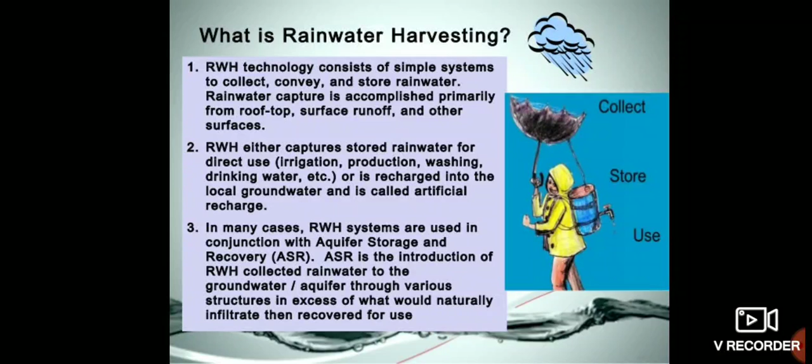So, the water conservation benefits of rainwater harvesting: the rainwater that falls on your roof and property is essentially free. All it takes is a method to harvest it into a tank for later use. Rainwater harvesting can be a great educational tool to get people to recognize their individual or household water uses.

For communities that rely on imported water to supply their needs, collecting rainwater that falls naturally in the community can reduce the need for imported water. Rainwater harvesting helps reduce peak demand during summer months, saving treated water for more important and appropriate water uses.

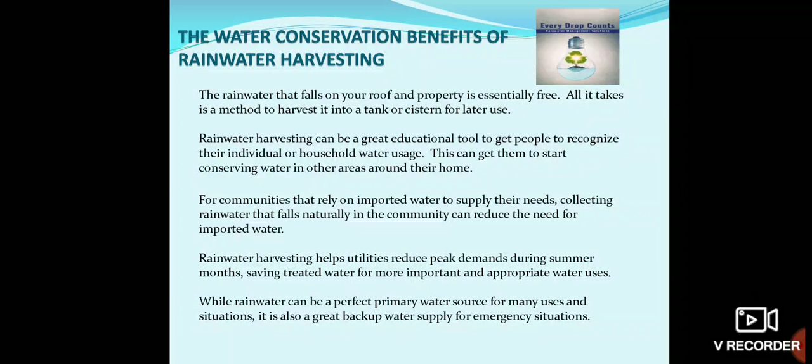While rainwater can be a perfect primary water source for many uses and situations, it is also a great backup water supply for emergency situations. So the environmental benefits of rainwater harvesting.

Rainwater harvesting can reduce stormwater runoff from property. The elimination of runoff can reduce contamination of surface water with pesticides, sediments, metals and fertilizers. By reducing stormwater runoff, rainwater harvesting can reduce the storm's peak flow volume and velocity in local creeks, streams and rivers, thereby reducing the potential for stream bank erosion.

Rainwater harvesting systems can be employed as a simple and effective method to meet a municipality's stormwater management program requirements for individual properties. It is an excellent source of water for plants and landscape irrigation since it has no chemicals such as fluorides or chloramines, that is chlorine.

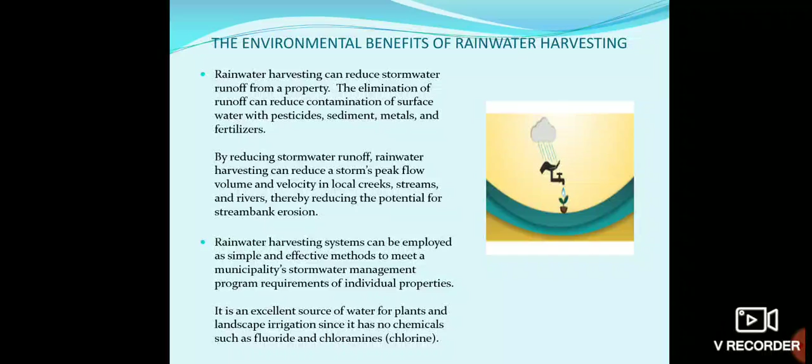So economic benefits of rainwater harvesting: collecting and using rainwater to replace municipal water use reduces your water bill. Reducing municipal water use for areas such as irrigation reduces the amount of water that the municipality has to treat and pump, thus in turn reducing the water service cost to the municipality.

The widespread implementation of rainwater harvesting within a municipality service area can reduce the long-term water development needs of the city, allowing the city to use their existing water infrastructure investment more efficiently.

The cost for a community to supply treated water is becoming more expensive every year. The cost of constructing dams, pipes and treatment plants, not to mention the cost of maintenance and infrastructure replacement, is huge. As water users, the ratepayers in the community ultimately will foot these rising bills.

Therefore, the practice of rainwater harvesting can reduce water demand and thus allow municipalities to provide potable water service at a lower cost. Designing and installing rainwater collection systems can provide sustainable jobs for the economy of the future. The rainwater harvesting industry can become a leading employer in the green infrastructure movement.

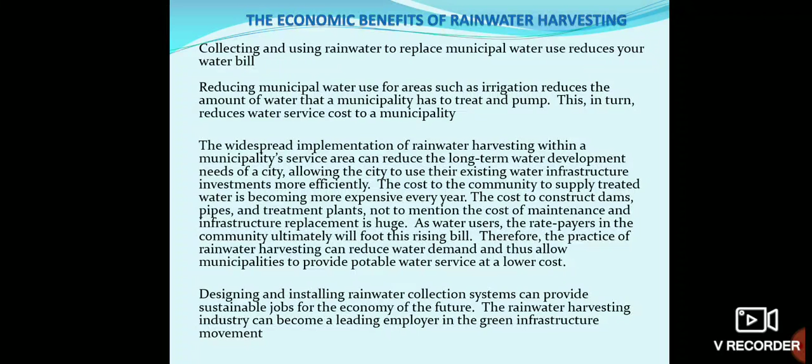Rainwater harvesting is vital for the future of sustainable water resources. As you can see from the benefits and advantages listed above, the practice of rainwater harvesting is an important and vital part of developing a sustainable water resource path for any community.

As local water resources are stretched to provide for population growth and economic development, new water supply strategies will be necessary to meet this demand. Rainwater harvesting is an untapped resource that could be developed quickly within communities and will have a tremendous impact. Rainwater harvesting is part of a sustainable water supply strategy for local communities.

So, sources of impounding and control of runoff water: farm ponds, trenches, contour bunding, and micro catchment. Here we will see some sources of control of rainwater.

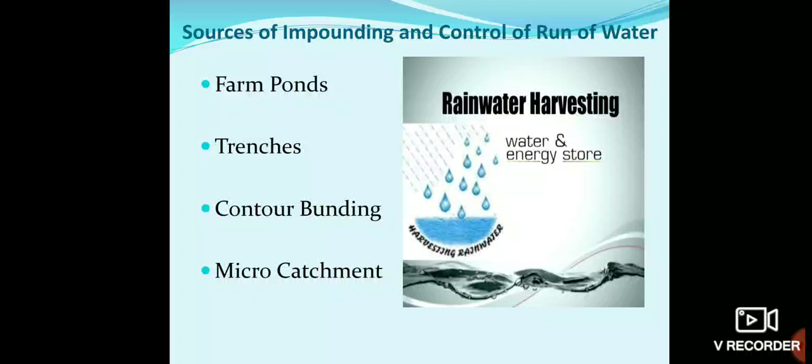First, we will go for the farm ponds. Farm ponds have a significant role in the rainfed farming system where the annual rainfall is more than 500 mm. They help in mitigation of the ill effect of rainfall variability as they store excess water from rainfall and provide for utilization during prolonged dry spells by means of supplemental irrigation.

It is also helpful for the pre-sowing irrigation of rabi crops. In high rainfall, semi-arid regions of India, farm ponds can be used for multiple uses such as protective and supplemental irrigation, fish culture, and integration with poultry.

So the ponds are also water harvesting structures, serving several purposes of the village needs such as supply of water for irrigation, cattle needs, social activities, etc., apart from fish production.

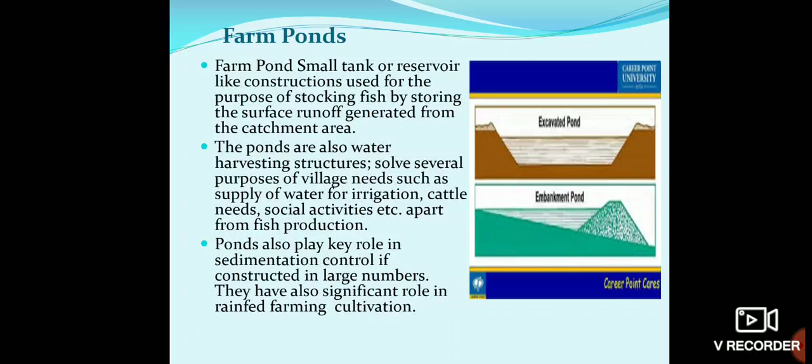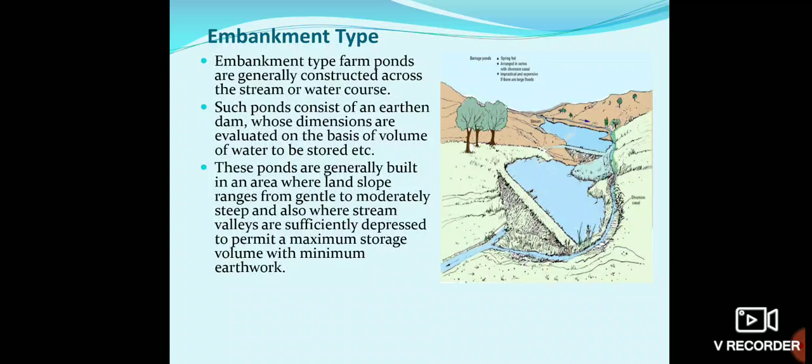There are two types of farm ponds: the embankment type and the excavated type. First, the embankment type. These ponds are constructed across streams or water courses and consist of an earthen dam. The dimensions of the embankment are determined based on the required storage. These ponds are suitable for gentle to moderately steep slopes and where the stream valley is sufficiently depressed to permit maximum storage volume with the least earthwork.

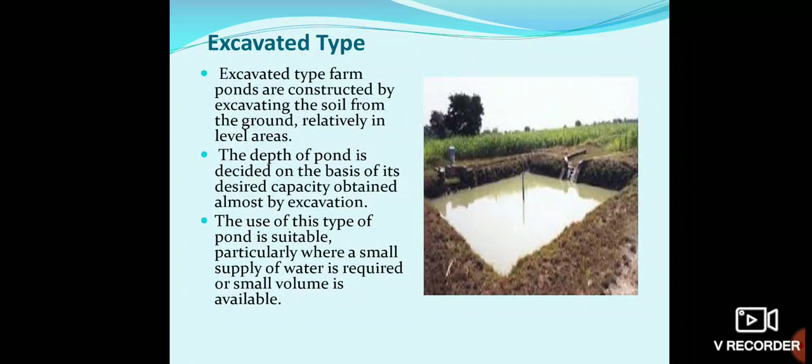Second type is the excavated type of farm pond. These are small dugout structures with well-defined shape and size, constructed at the lower portion of the farm, and the stored water is generally used for irrigation. In some places, farm ponds are used for recharging groundwater. However, for recharging groundwater, high capacity structures located in highly permeable soils are more suitable. These structures are also called percolation tanks.

Now, selection of the farm pond site. From an economical point of view, a pond should be located at a site where the largest volume can be obtained with the least volume of earthwork and by submerging the minimum area. These conditions generally occur where the valley is narrow and the side slopes are relatively steep. Such sites help reduce the area of shallow water, which in turn reduces evaporation losses. It should require a short dam below a broad pond area with steep sides.

Removal of trees and other vegetation should be minimum. The site should have a suitable foundation for the dam, and there should not be excessive seepage through the foundation. Construction material should be easily available nearby, and there should be natural waterways to use as an emergency spillway.

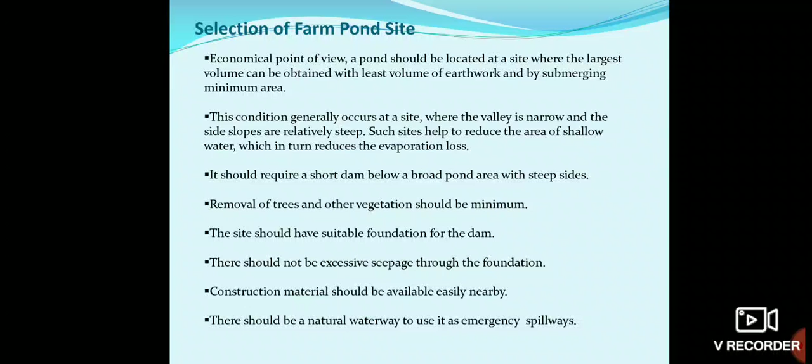Next we will see about trenching. Trenching is one of the most major engineering measures for erosion control in non-arable lands, mainly aimed at slope stabilization and drainage line treatment. Areas with steep slopes, in hilly regions, are prone to soil erosion due to lack of vegetation cover and accelerated transportation of soil. Hilly areas exhibit high rainfall and quick drainage, which provides little retention time for runoff to infiltrate into the soil profile.

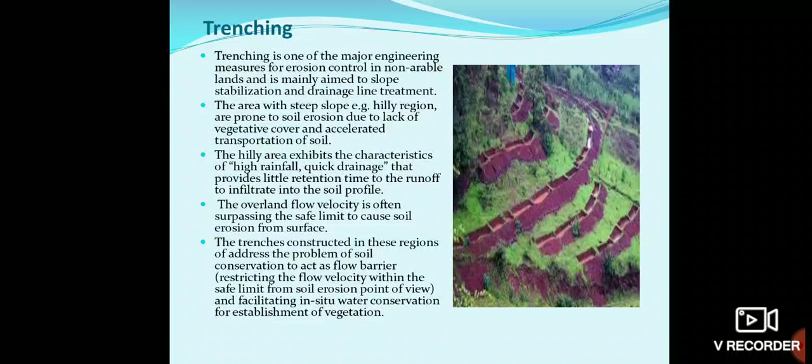The overland flow velocity often surpasses the safe limit, causing soil erosion from the surface. Trenches are constructed in these regions to address the problem of soil conservation, acting as a flow barrier and facilitating in-situ water conservation for establishment of vegetation.

Next we'll see the types of trenching. There are generally four types of trenches: continuous trenches, inline trenches, staggered trenches, and contour trenches.

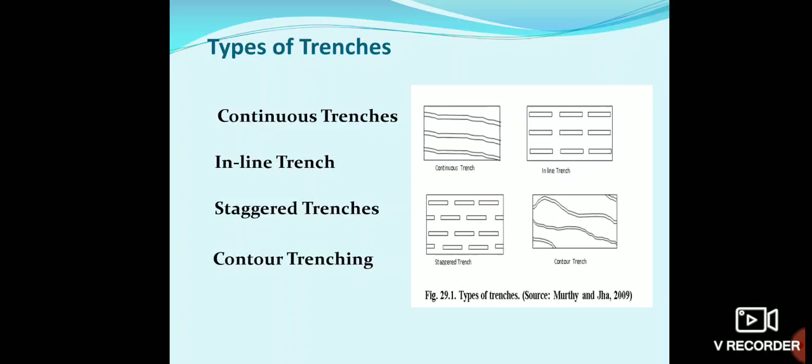First is the continuous trenches. These are a series of broad channels or embankments constructed at a suitable spacing along the graded contours of a gentle slope. They are suitable for areas having high rainfall. This type of trench is as long as 50 meters and has a fixed interval of 15 to 30 meters. In this type of trench, horizontal intervals are fixed but vertical intervals are varied.

These trenches are easy to construct, but there is a problem of inconsistent deposition of soil in the trenches due to the varied vertical interval, making them difficult to maintain. The cross-sectional area of the trench is usually kept at 0.25 square meters, and depth should not be higher than 0.5 meters. The life of the trench is considered to be 5 years.

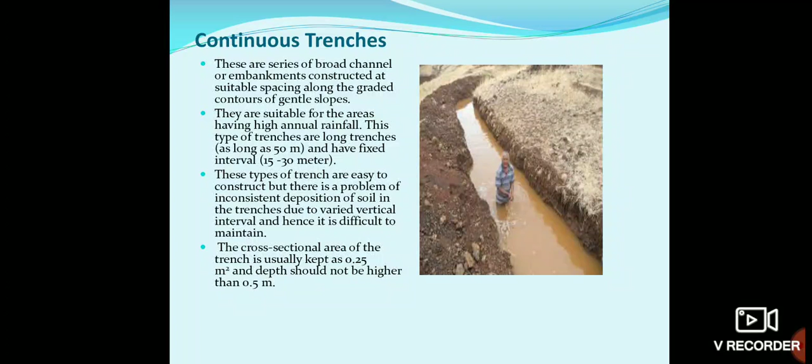Next is the inline trench. This type addresses the problem of inconsistent deposition of soil. These trenches are a maximum of 5 meters long, with a cross section similar to the continuous trenches. The gap between two inline trenches should not be more than 2 meters. This type of trench has the limitation that it fails to collect the runoff flowing between the gaps of two trenches.

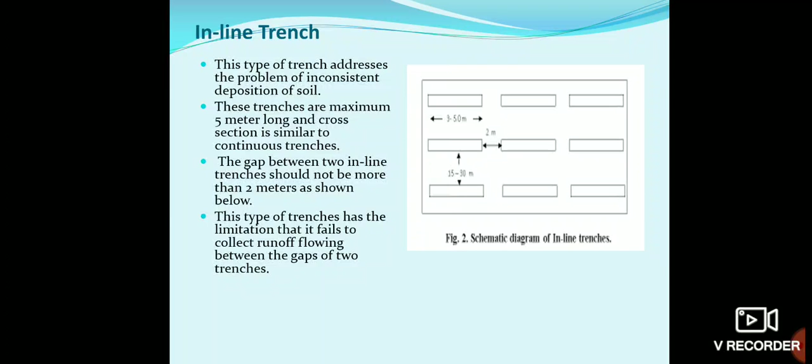Third is the staggered trenches. These involve excavation of trenches of shorter length in a row along the contour, with interspace between them, arranged in a straight line. Suitable vertical intervals between the rows are restricted to impound the runoff without overflow. In alternate rows, the trenches are located directly below one another. The trenches in successive rows are thus staggered, with the trench in the upper row and the interspace in the lower row being directly below each other.

The length of the trench and the interspace between trenches in the same row should be suitably designed such that there is no long unprotected or uninterrupted slope to cause unexpected runoff or erosion. As the trenches are not continuous, no vertical disposal drain is excavated. The cross-sectional area of these trenches should be designed to collect the runoff expected from intense storms at a recurrence interval of 5 to 10 years.

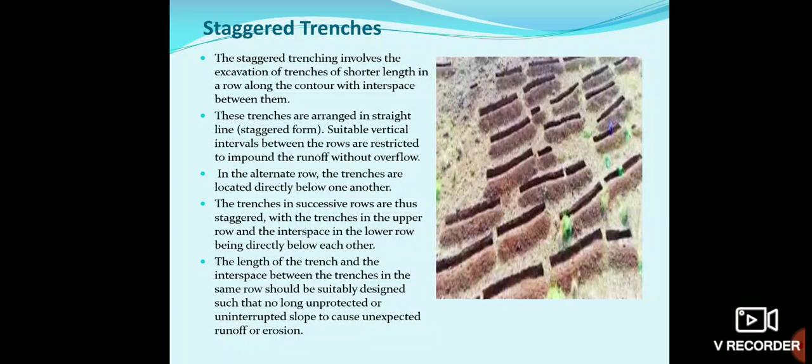Next type of trenching is contour trenches. These are similar to continuous trenches except they follow the prevailing contour of the area. In contour trenches, the horizontal interval varies, unlike the continuous trench, but the vertical interval is fixed, usually 3 to 5 meters. This type is a little difficult to construct but has advantages over continuous trenches in terms of consistent deep deposition, easy maintenance, and less risk of failure.

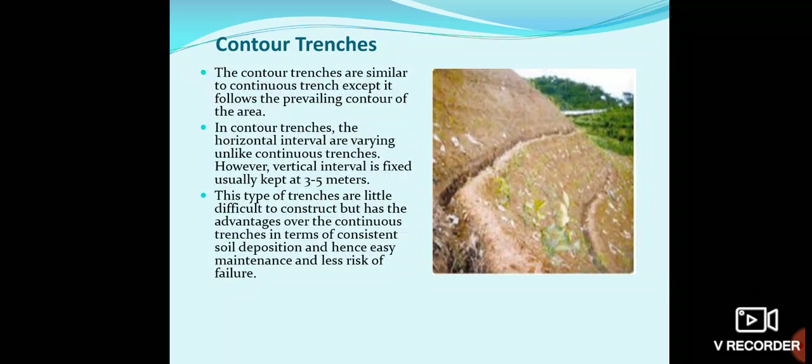Next we will see about the microcatchment. Microcatchment water harvesting systems are designed to trap and collect runoff from a relatively small catchment area, usually 10 to 500 square meters, within the farm boundary. The runoff water is guided into an application area where it accumulates in holes, pits, basins and bunds. It infiltrates into the soil and is used to grow plants.

The collected water is stored in the root zone and supplies the crops. The size of the catchment can be easily controlled by the farmer, which makes the system easy to adopt and replicate, as the water is stored within the soil profile in the root zone and used for plant growth.

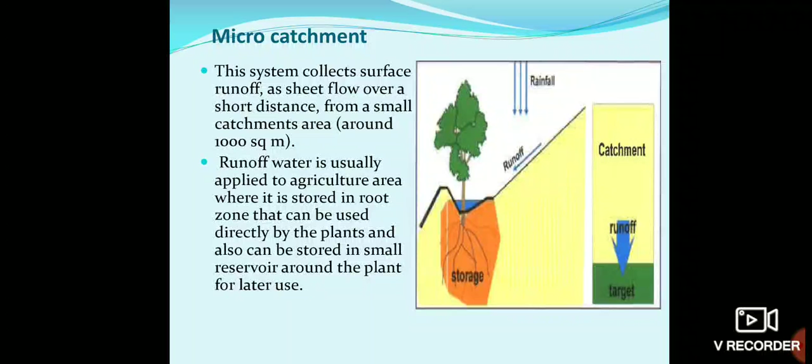Microcatchment water harvesting is suitable for semi-arid and arid areas with high rainfall variability within the season. They can be constructed on almost any slope, including nearly level plains, wherever there is overland flow to capture. Soils need to be deep enough to construct the holes and pits and store the collected water. This technique can also be applied on highly degraded soils, where it can be used in the productive rehabilitation process, reducing erosion and flooding.

Now we'll see some systems of the micro water harvesting technique. First are the semicircular or trapezoidal bunds. Semicircular bunds are usually made of earth or stones and commonly have a diameter of 1 to 8 meters. The bund tips are set on the contour lines facing upslope.

The bunds are 30 to 50 centimeters high. The greater the slope, the more the bunds have to be strengthened with stones. In this way, the technique can be used on level land, but it can also be used on slopes up to 15%. The establishment and maintenance of this system is labor intensive.

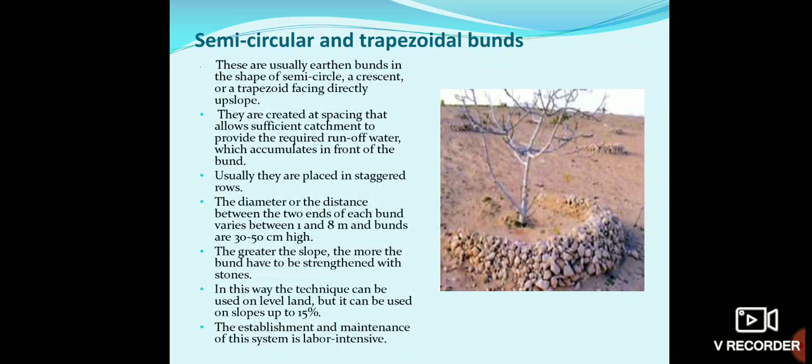Next one is small pits. Pitting is a very old technique used mainly in Western and Eastern Africa. The pits are 0.3 to 2 meters in diameter. The most famous pitting system is the Zai system, used in Burkina Faso, which consists of digging holes to a depth of 5 to 15 centimeters. The pits are applied in combination with bunds to conserve runoff.

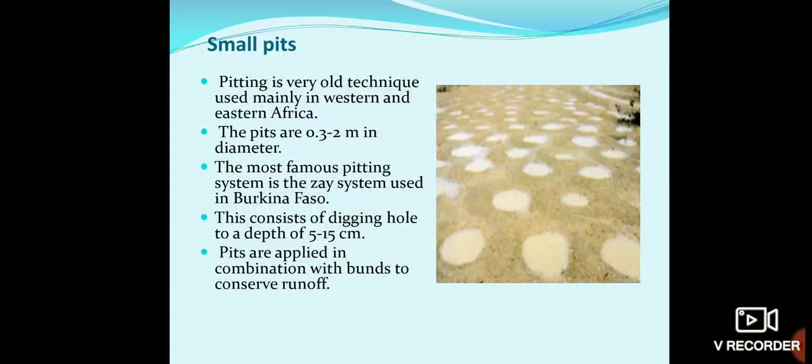Next one is the small runoff basins, also called Negarim. Small runoff basins consist of small diamond-shaped or rectangular structures surrounded by low earth bunds. The reported size of Negarim is 100 to 250 square meters, though they are commonly found on slopes of 1 to 5% in areas receiving 150 to 500 mm of rainfall annually. In the Middle East, Negarim are used for fruit trees.

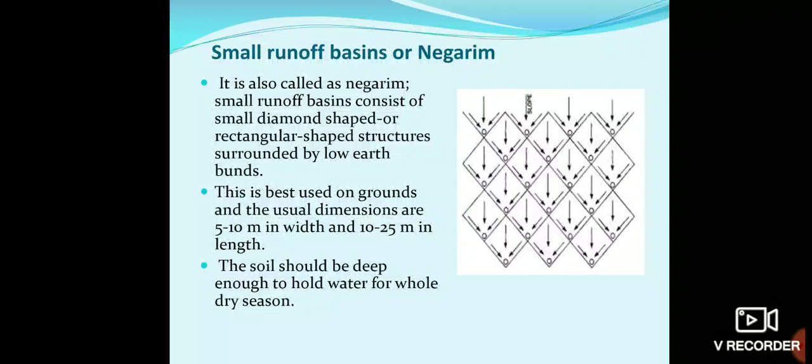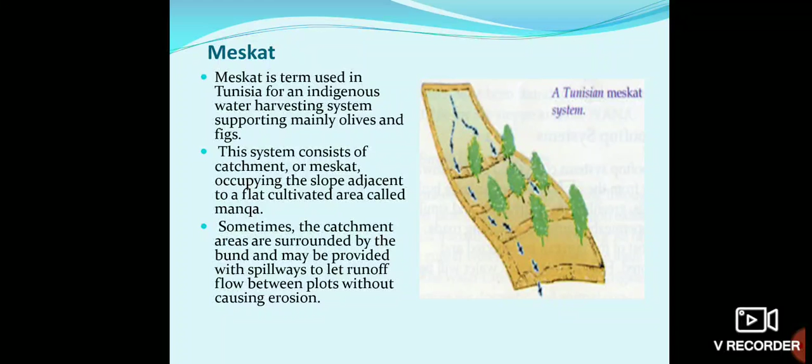Next one is the Meskat. Meskats are rectangular-shaped runoff basins with a catchment area of about 500 square meters and a cropping area of 250 square meters. The entire system is surrounded by an approximately 20 centimeter high bund. It is applied in areas where the slope is 2 to 15% and annual rainfall is 200 to 400 mm, and is suitable for growing trees.

Next type is the contour bench terraces. These are constructed on very steep slopes to combine soil and water conservation with water harvesting techniques. The terraces are usually provided with drains to release excess water safely.

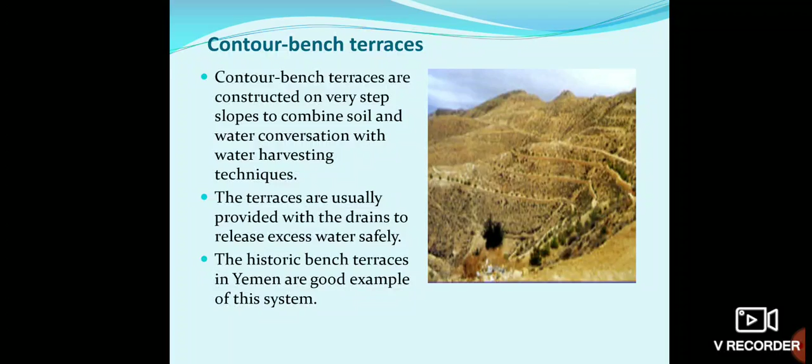Thank you. This was all about the water harvesting technique.